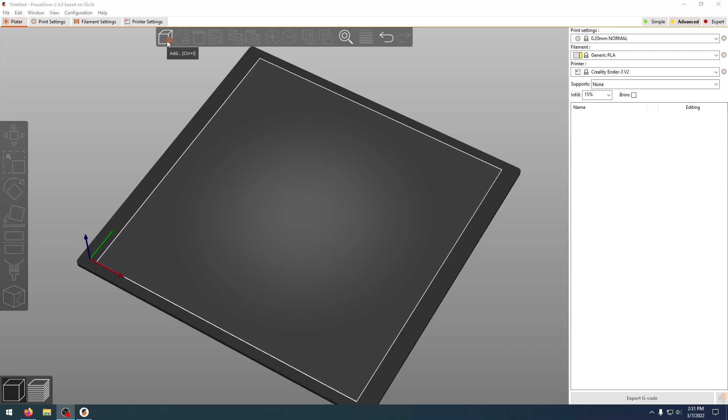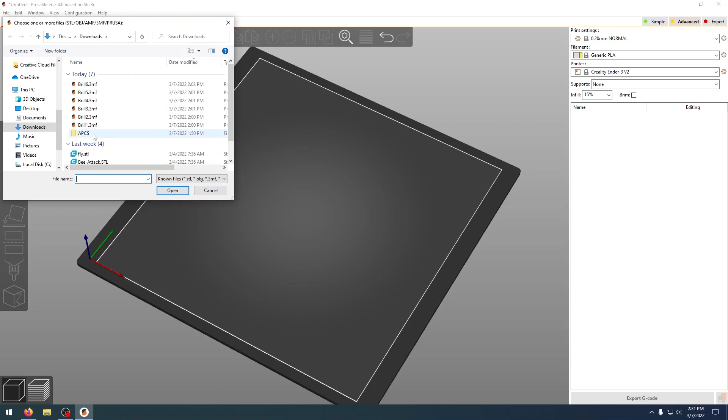So in here, on our top bar, we have an add button. And after we hit add, we're going to want to find where we saved our files. You may have saved them in a flash drive on the side, or if you have them saved on the computer, you can find it there as well. I saved mine in downloads. So here are my 6 pieces that I exported from Fusion 360. I'm going to click on each one and I'm going to import them into my workspace.

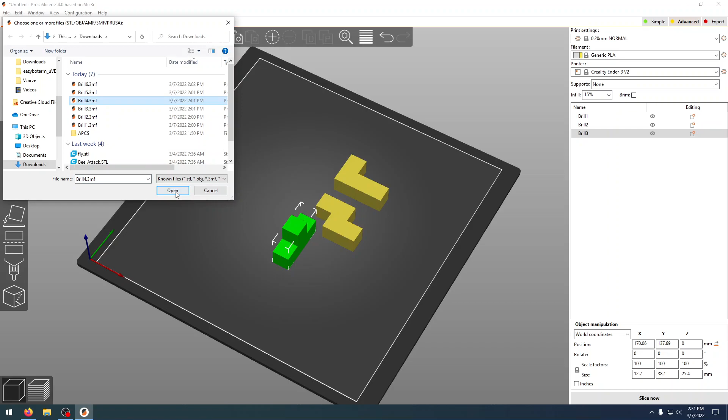So as I bring these in, you'll notice that I'm bringing them close to the center of our 3D printer. And I am also bringing them relatively close together. The one nice thing that when we were drawing these up in Fusion 360 is that I laid them flat after we joined each one of those little cubes. And what that did for us is that allowed us to have these come in nice and flat like that.

Now, let's say when you exported them from Fusion 360, you missed one of them or you accidentally didn't have one like that, so that there was a support or an overarching area that needed support underneath. We can still lay them flat inside of our slicer. And on our side panel right here, we have a place on face button there. And you'll notice that when we click on that, we have these little white translucent blobs up here, and that's representing the face that we want to put it to.

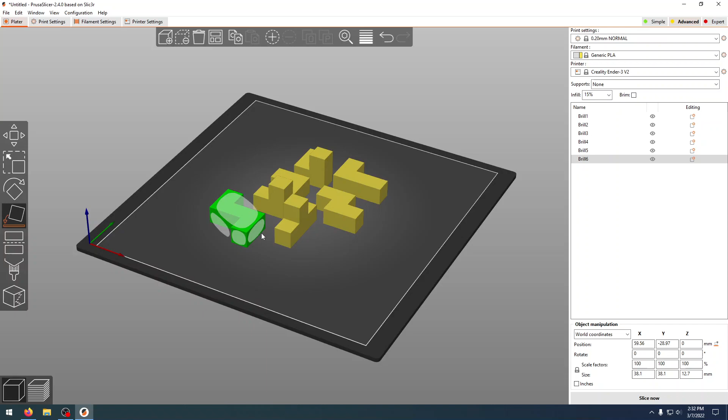So let's say I want to lay this piece down. I'll highlight it, and if I click on that surface right there, it's going to lay it flat for us. Now, I don't want that part over there. I would like it back over here, so I can click on my move button. I can move it back to where it was. Now we have all of our pieces laid out. We have them all flat.

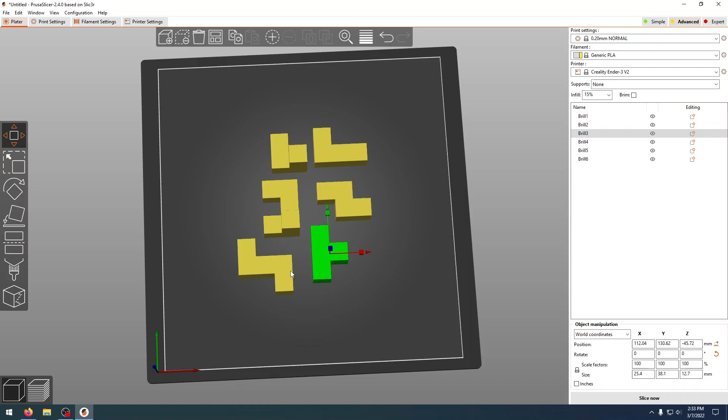We want to make sure that we are relatively in the center of our build plate. The reason being is our build plate is heated, and you'll have the most success with your parts sticking to your heated bed if you keep it in the center. As you start printing more along the edges, it doesn't like staying as warm over there, and you can run the risk of having parts pop off.

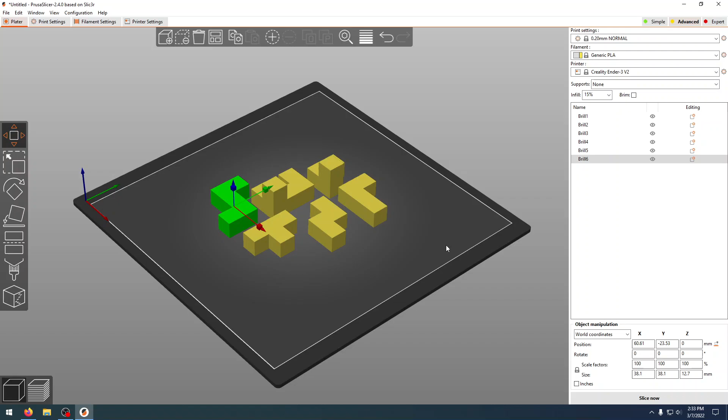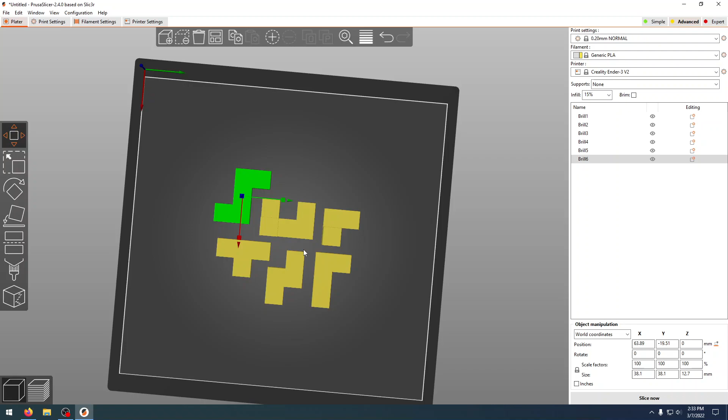And then the last thing is we want to make sure that everything is relatively close to each other, because as our printer goes from one part to the other, we don't want to have to be wasting time having our print head come up, come back down. Right? But we want these as close as possible, but we don't want to have them touching.

So after we have all of our pieces in there, we have all of our surfaces placed on a face so that we don't need to use supports. We're going to come over to the right-hand side of the screen. And on top, what we want to do is we want to select our Creality Ender 3 V2. And we want to double check that we are using our PLA. Our PLA is a good starter filament to use. It has certain properties that are easier for us to print with.

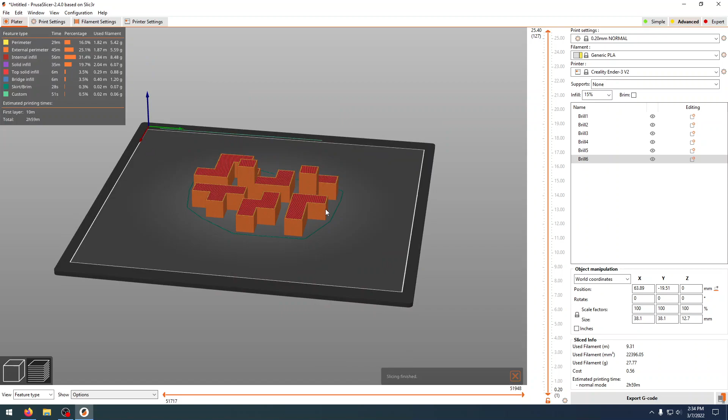Our infill, we want to have at 15%. We don't want to be using supports. None. And we also do not want to be using a brim, so make sure that that's not checked. Last thing we need to do is we need to click on Slice Now. And when it slices, it changes what the view looks like. If we want to ever get back to our 3D editor view, we can just click on that button over there. And it'll bring us back to our original view.

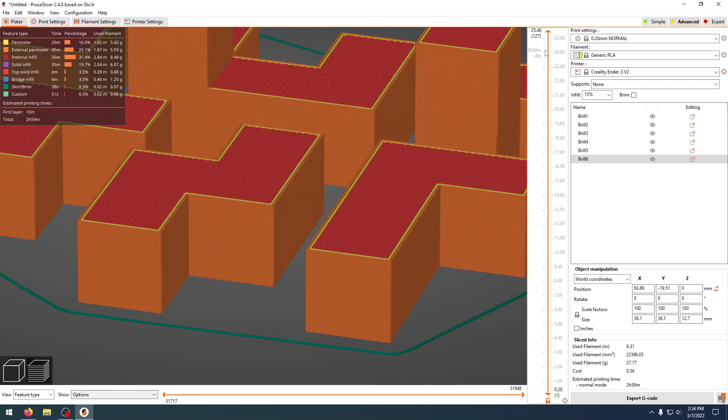But for our preview or our slice view, we click on there and we can see all the different tool paths that our 3D printer will be taking. If we want to see what each layer will look like, we can drag this down over here and we can see what our infill, everything like that looks like. But for this, everything looks good. I'm going to export G-code.

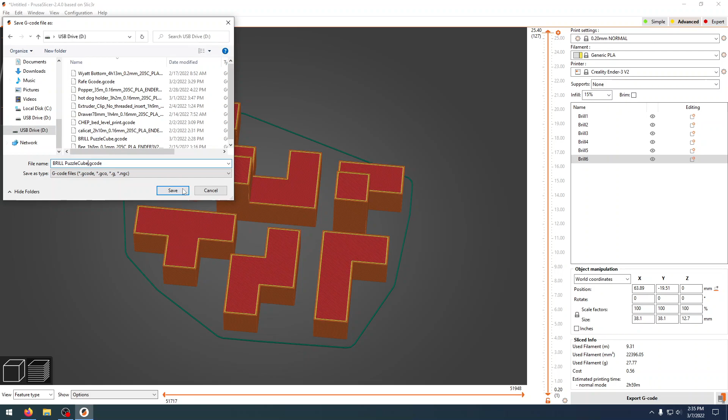And when we export this, we want to export this onto a micro SD card from over in the Fab Lab that we can get either from the spot next to the computer or from one of the Ender 3s. What I'm going to do inside of this is I'm going to type in my last name, so Brill, and then a description of what it is. So this is going to be my puzzle cube. Type in P. And when we hit save, I already have a file like this on there, so we'll hit save to overwrite it.

And when we have finished exporting, what we want to do is we want to click on the eject drive button right there, and it'll unmount our SD card. What we'll do then is you'll go on to the next video and you'll learn how to set up your 3D printer with your SD card ready for 3D printing.